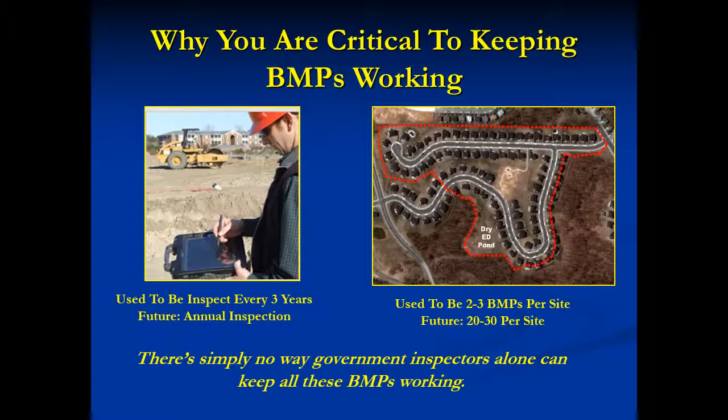Most groups focus on policy issues, education, or restoration projects. Very few groups have ever inventoried watershed activities to ensure compliance.

There are 5 topics which make up this presentation. With the knowledge provided by these topics, you can look at a small sampling of stormwater BMPs in your watershed and get a sense of maintenance quality. If you find that all are well maintained, then go on to the next regulated activity. If not, then pursue the suggestions offered here and in the manual for providing local government with the public support essential to improving maintenance.

About 80% of all Americans live in suburban urban areas. This means that the waters closest to our homes are degraded due to stormwater runoff and other impacts from our homes, businesses, streets, parking lots, and other impervious surfaces. This aquatic resource degradation is due to these 5 changes brought about by watershed development.

For those of you not familiar with the term, a watershed is all that land which contributes water to a wetland, stream, river, lake, estuary, or some other type of water body. On the left, the red line delineates the 64,000 square mile Chesapeake Bay watershed, and any rain falling within the red line will eventually enter the bay or evaporate back into the atmosphere. The perimeter is formed by hilltops, ridgelines, and other high points which divide the watershed of one body from that of another water body.

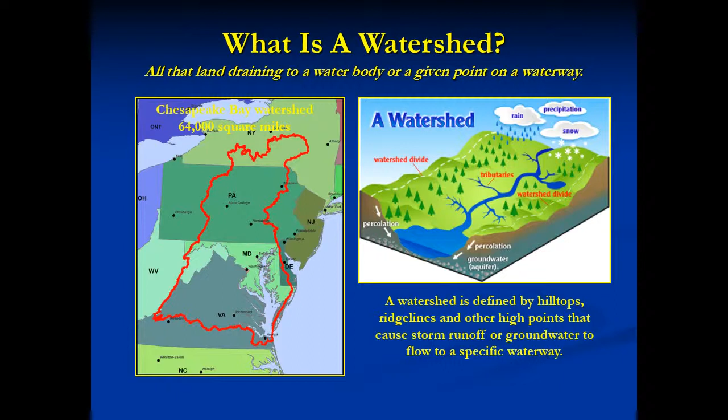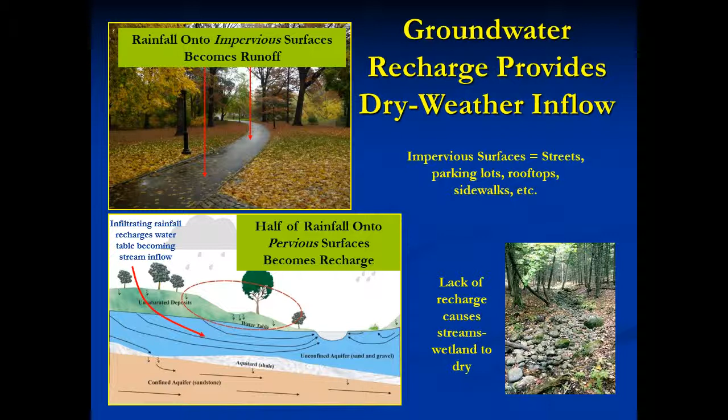In general, about half of the precipitation falling upon a watershed will soak into the soil to a depth below the root zone of trees or other vegetation. This infiltrated water will then flow through the earth until it encounters a well, a seep, a spring, a stream, a lake, or a tidal body. It is this process which provides the water entering a wetland or stream when a few days have passed since the last rain. The movement of rain or other precipitation into the soil is called groundwater recharge. Covering the land with streets and other impervious surfaces prevents recharge and increases surface runoff.

By physical damage, we mean heavy equipment operating in wetlands or stream channels, as well as the removal of forest from near channel buffer areas and the floodplain. While the major bay watershed states have achieved tremendous success in slowing the pace of aquatic habitat destruction, it still occurs, and it can take decades to a century for a waterway to recover from this form of impact. This is why it's critical to preserve forest buffers along waterways and wetlands.

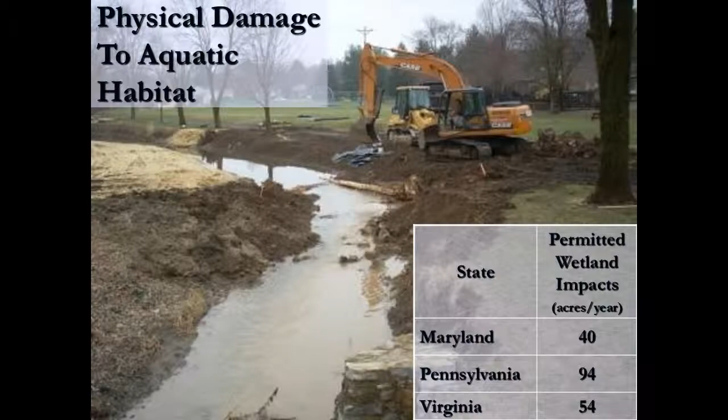Converting a forested watershed to one blanketed by homes can increase the frequency and severity of flooding by 100-fold. In other words, floodwater volumes and velocities that once occurred every 100 years before development can come annually once home construction is completed. The tremendous increase in the velocity and volume of floodwaters causes a dramatic increase in stream channel erosion.

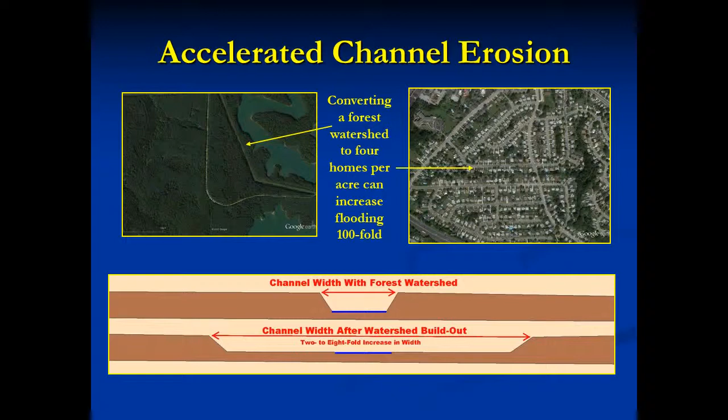Part of the increase is due to replacing permeable forest soils with impervious surfaces like rooftops and asphalt. The other part is due to replacing natural channels which slow runoff velocity with very smooth street gutters and storm drains. These smoother surfaces allow runoff to gather quickly into massive scouring floods. Combined, these two mechanisms can cause a forest channel to erode to a width of 2 to 8 times greater following watershed development, as you see at the bottom of the slide.

Runoff from developed lands can transport more than 100 pollutants into waterways. In fact, most aquarium fish would die if placed in runoff collected from a suburban or urban street. A substantial portion of this pollutant originates from industrial smokestacks, car exhaust, or other air pollution sources. When this air pollution settled on the forest floor, much was removed when transported into the soil by percolating rain. But in a developed area, the pollution settles on rooftops, streets, and other impervious surfaces, where instead of soaking into the soil, it washes away with the next rain.

Other pollution sources include lawn fertilizers and pesticides, pet waste, and dumping oil down storm drains, to name but a few. Highly effective BMPs reproduce the forest floor effect with organic filters that allow treated runoff to infiltrate underlying soils.

Scientists have found that a minimum amount of forest must be retained in a watershed to keep waters in a condition suited to sensitive fish, wading, or even swimming. To preserve high-quality waters, a minimum of half the watershed must be forest. The poorest quality waters have less than 30% forest cover.

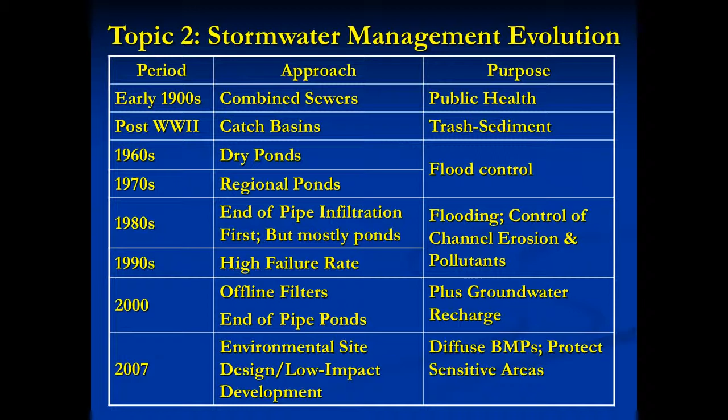Here you see an example of the type of stormwater management practiced before the 1960s. Toilet water and street runoff would be carried in the same combined sewer pipes to a wastewater treatment plant. This worked fine during low-volume rains, but the sewers would overflow come higher volume floods, causing extensive pollution. Catch basins did capture gravel and coarser objects, but not much else.

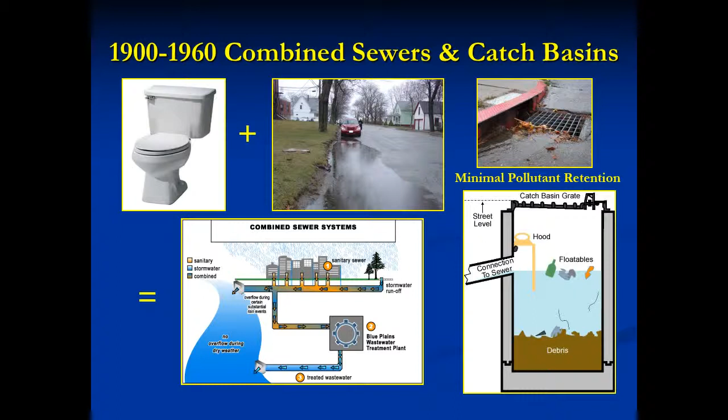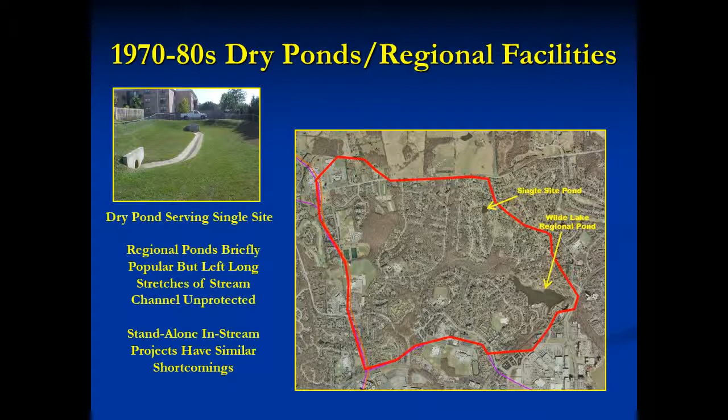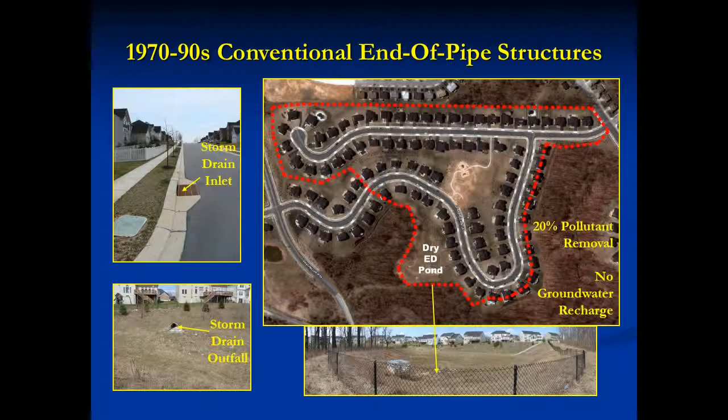Earlier I mentioned end-of-the-pipe structures. This is what I meant. The red dashed line defines the drainage area for the dry extended detention pond on the right. There are 80 homes located within the 28-acre pond drainage area. The pond is the only stormwater facility serving this 28-acre area. Runoff from the drainage area enters inlets like the one you see on the left, then discharges into the pond at this outfall. Unfortunately, extended detention provides very ineffective pollutant removal and poor aquatic resource protection. The large drainage area also increases the likelihood that this practice will eventually fail.

In the 1980s and 90s, infiltration practices began to appear. The idea is simple: you excavate a trench into sandy or other permeable soils, line the trench with filter cloth, and fill it with stone. You then divert runoff from nearby streets or other impervious areas into the stone-filled trench, where pollutants are removed and the filtered runoff soaks into the adjacent soils. An infiltration basin resembles a pond, but is built on permeable soils and is designed so most runoff percolates down through the bottom.

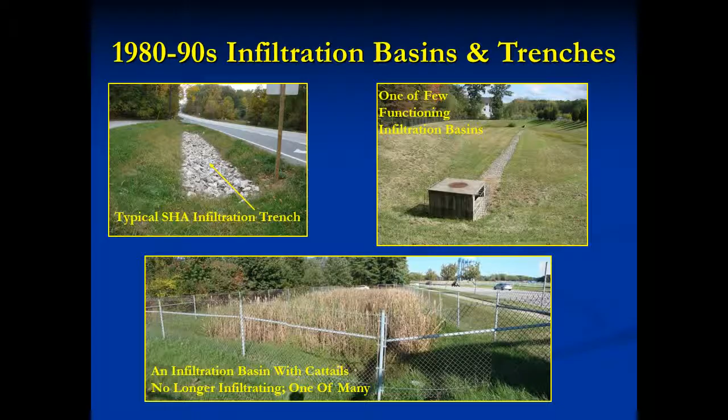Around 2005, we started seeing LID and ESD, and with it smaller, highly effective BMPs spread throughout a development project, usually in places that would have been landscaped otherwise. They're placed at the edge of parking lots or at roof downspouts, so they're before the pipe. This approach mimics forest conditions and has the potential to allow development with very little aquatic resource impact.

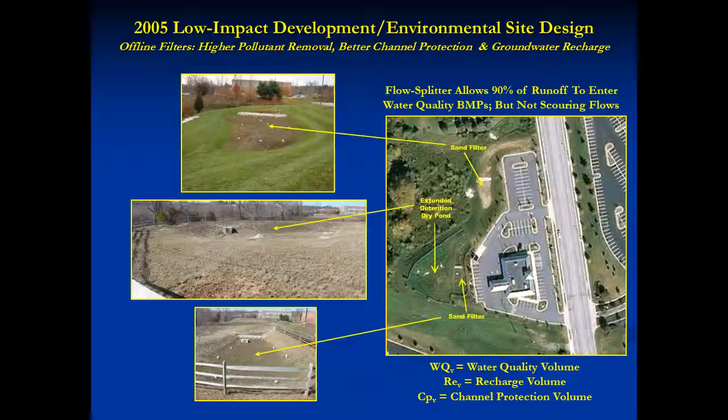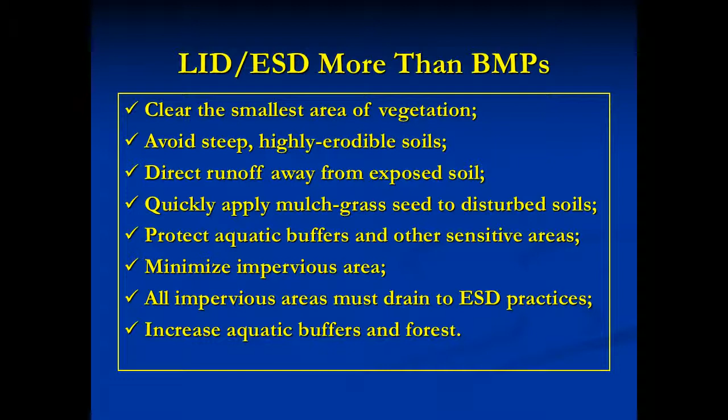But ESD and LID are more than just highly effective practices to treat runoff. Here we have a distillation of ESD-LID basic principles. The idea is to design projects to be as compact as possible by minimizing road widths, building multi-story rather than one sprawling one-story structure. It's easier to fit a compact project onto the least erodible portions of a site while preserving aquatic resource buffers and forest. The compact design reduces impervious area and makes it easier to locate these areas so they drain to soils suited to highly effective ESD-LID practices.

Here we see four typical ESD-LID practices. By spreading the practices throughout the site, groundwater infiltrates the soil in a more natural, diffuse manner. It's hoped that the smaller drainage areas and the use of mulch will result in lower failure rates and better pollutant removal.

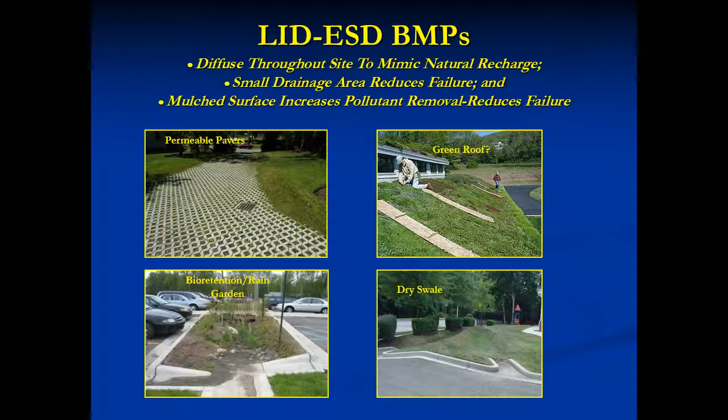While ESD and LID can halt the loss of additional waters due to new development, they also have the potential to restore waters degraded by past growth. For example, let's say a 1-acre fast food store is redeveloped as an auto parts store, but with highly effective ESD-LID practices. The uncontrolled runoff from the fast food store was degrading an average of 300 feet downstream.

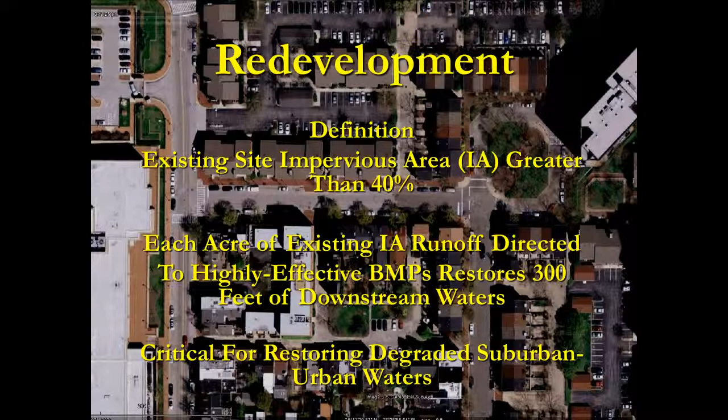Since the new store drains to these highly effective practices, those 300 feet of waterway are no longer impacted. There has been a trend in some areas recently towards reliance upon in-channel stream restoration projects to restore degraded suburban and urban waters. While these projects certainly have a role to play in restoration, they must follow the installation of runoff control measures throughout a developed watershed. Otherwise, the tremendous power of floodwaters could cause these in-channel measures to quickly fail.

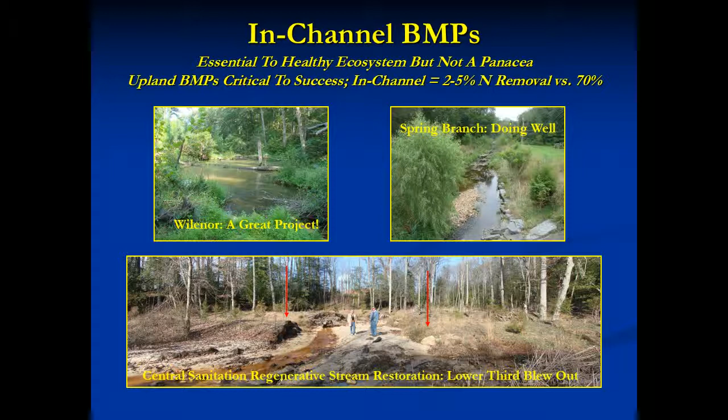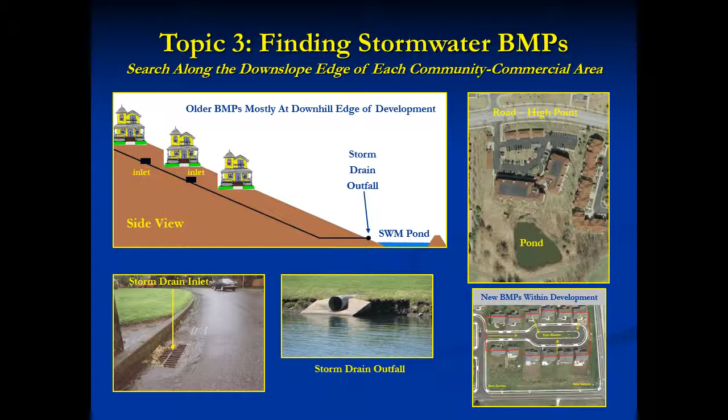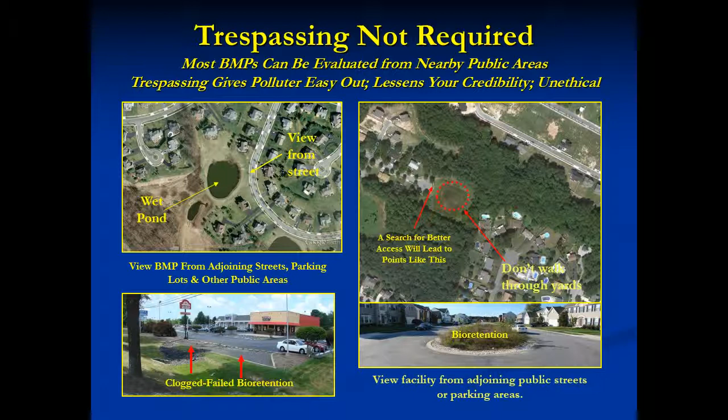The vast majority of BMPs can be evaluated from adjoining parking lots, streets, or other public areas. Please do not venture onto private property or walk past a no trespassing sign to evaluate a BMP. If this is necessary, then request the property owner's permission first.

Most BMPs fall into one of three categories: ponds, infiltration, and bioretention or filters. Most ponds are dry between storms, while the most effective retain a permanent pool of water. Infiltration measures usually have an observation well, frequently made of white plastic pipe. Bioretention and filters have a surface depressed about a foot below the first point where runoff could overflow. Observation wells are common too.

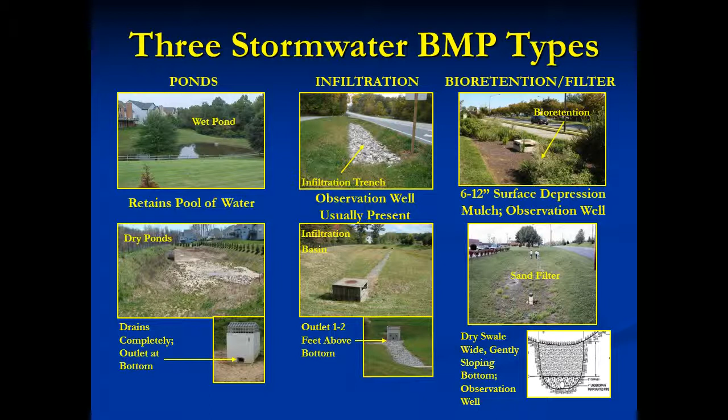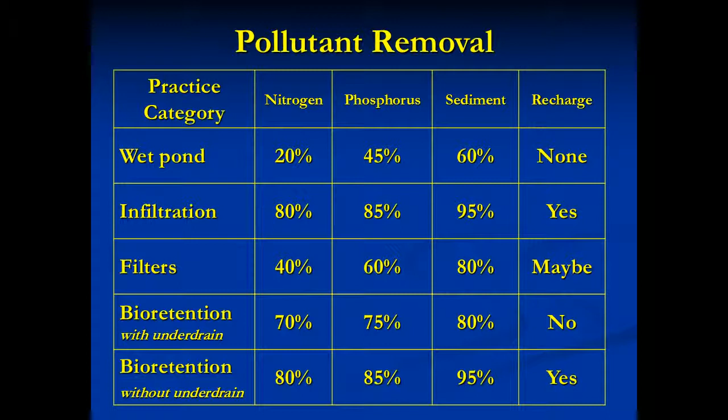Here we see a comparison of the relative effectiveness of the three BMP types. Clearly, infiltration and bioretention without an underdrain removes the most pollutants and also allows the treated runoff to recharge the groundwater table. This recharge provides the dry weather inflow to wetlands, streams and other waters. Filters can provide recharge too, unless they are fitted with an underdrain. Underdrains are used where soil is not very permeable or there is a shallow depth to rock or water.

Now for topic 4. With regard to ponds, we urge you to focus on those that hold a pool of water. These are the most effective ponds. Pollutant removal in ponds is all about storage volume. The more water, the more time pollutants have to settle from suspension. Over time, a pond captures sediment, which is then colonized by cattails and other vegetation. If a pond has lost more than half its original volume, then it needs to be cleaned.

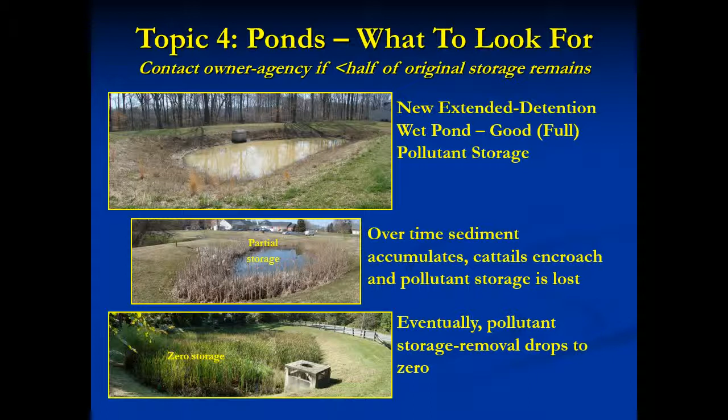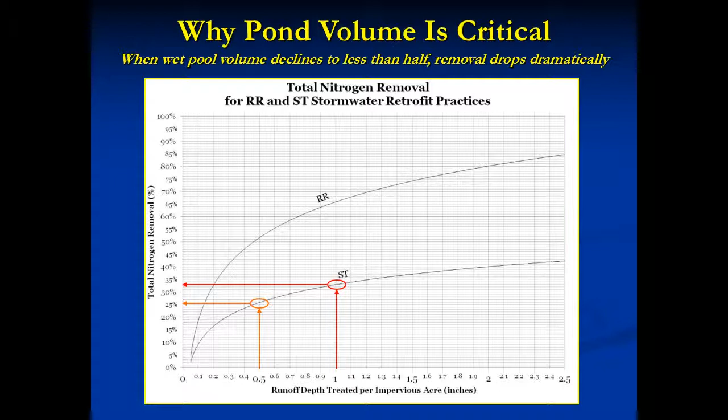This graph is from the Chesapeake Bay Program's guidance for stormwater pollutant removal. Ponds belong to a group of BMPs known as stormwater treatment, or ST measures. As this graph shows, a pond that stores the first half-inch of runoff from impervious surfaces captures about 25% of the nitrogen entrained in that runoff. Most ponds are designed to store an inch of runoff when new. Such a pond captures 33% of the nitrogen. So as storage declines, so does pollutant removal.

Ponds are constructed in two ways. On flat sites, a pit is excavated to form the pond. On hilly sites, an earth embankment is placed across a shallow valley.

Of the two, embankment ponds are most likely to have safety issues. When viewing the dam forming an embankment pond, look for any low spots. If floodwater overtops the embankment and concentrates at such a low spot, the dam could wash out. Trees, animal burrows, or wetlands on the dam are also cause for concern and must be eliminated.

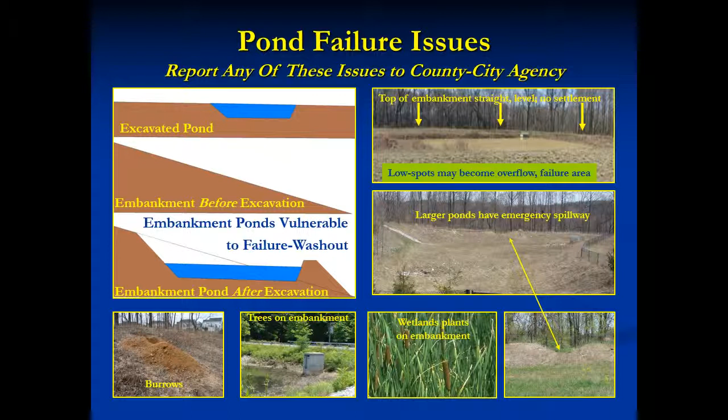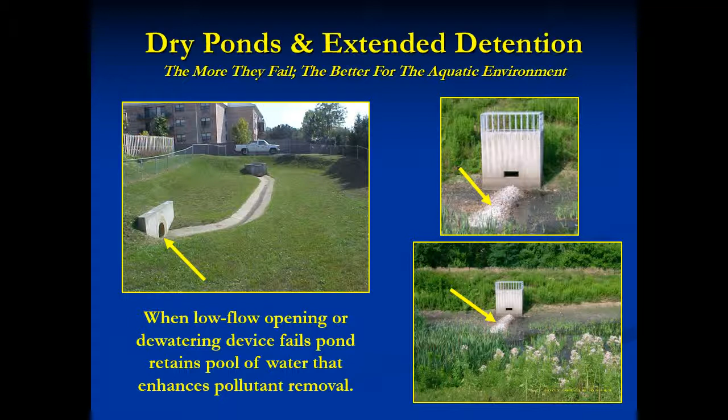Earlier we said to ignore ponds that don't hold a pool of water. These are dry or extended detention type ponds. Dry ponds trap 0 pollutants. Extended detention ponds might trap 5 to 25% of the pollutants transported into them. However, both may fail in ways that cause retention of water, which enhances pollutant removal. But failures can be dangerous. It's better to retrofit these ponds so they can safely store a permanent pool of water.

Infiltration basins look a lot like a dry or extended detention pond. To tell the difference, look for observation wells, or a stone trench on the floor, or the basin bottom, which penetrates down into permeable soils. Also, the first point where runoff can exit will be at least a foot or two above the pond bottom.

Over time, fine particles may accumulate on the basin floor, sealing the surface. These areas then hold water for longer periods. Eventually, wetland vegetation may grow in these areas. These clogged soils should be scraped away to restore infiltration.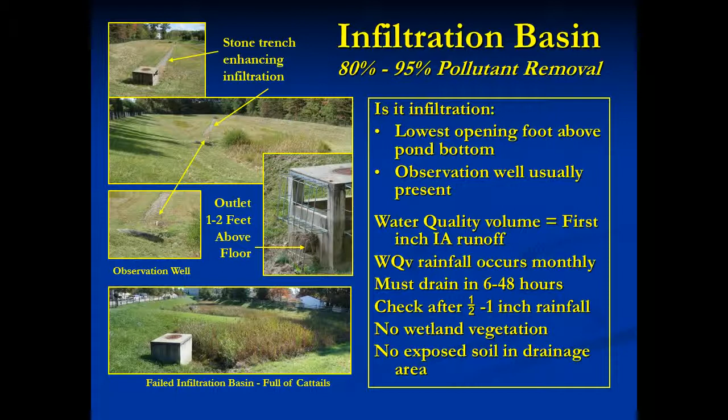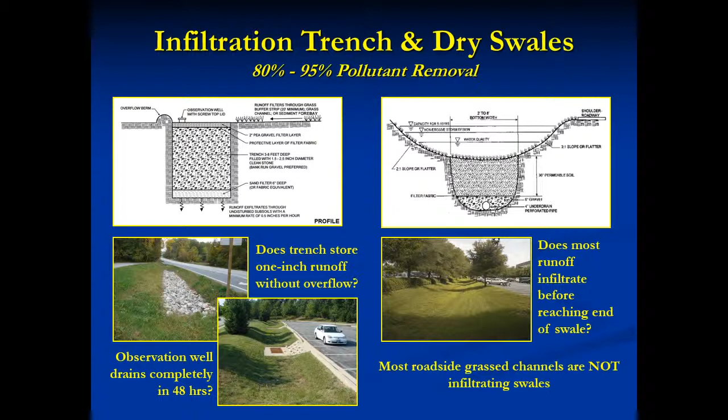With infiltration trenches, look for indications that it can no longer treat the first inch of runoff. This is best done with the rain gauge and float method you'll see a few slides from now. With dry swales, look for evidence that the surface is clogged, wet spots when several days have passed since the last rain, or wetland vegetation.

Bioretention will be the most common BMP in the future. Most consist of a pit 3 to 5 feet deep. The bottom may have a gravel layer, though most of the pit is filled with a mixture of sand and organic matter resembling planting soil. The surface has a 2 to 3 inch layer of wood mulch. The mulch surface is depressed a foot below the point where runoff could exit first. Here you see 4 examples.

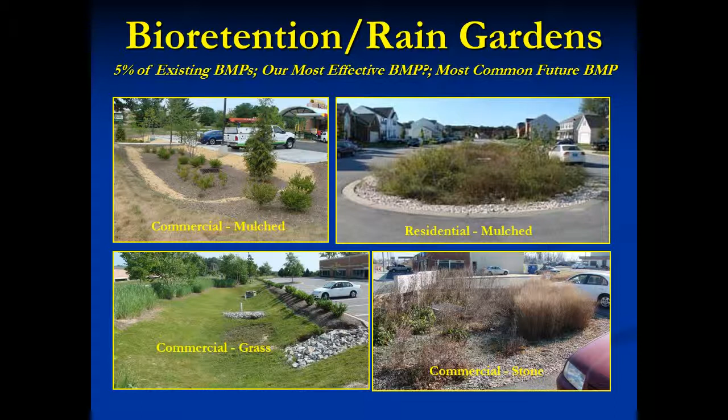Here you see a cross-section of a typical bioretention facility. The 2 most critical bioretention components are the surface layer of mulch or vegetation, along with the highly permeable planting soil, which allows runoff to percolate through the underlying soil where recharge occurs.

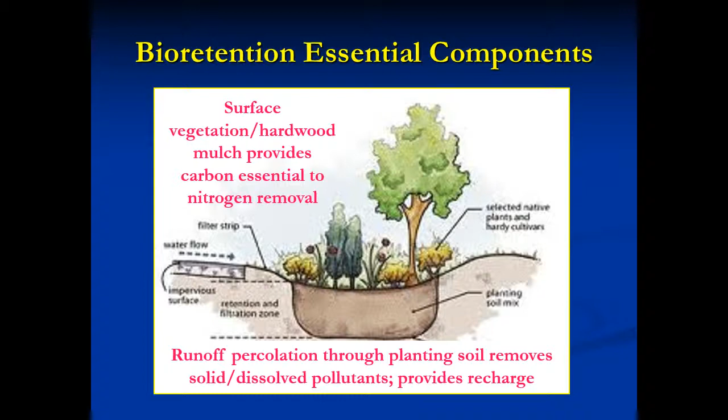Bioretention facilities must drain completely in 48 hours. So if you see standing water or wetland vegetation, repairs are needed. Note the storm drain inlet in the lower left. You'll see such an inlet in most bioretention facilities.

The surface of the mulch must be at least 12 inches below the point where accumulating runoff could first enter the inlet. This 12-inch storage allows the facility to treat 90% of all the runoff it receives. If the storage depth is less than 6 inches, then cleaning is likely required.

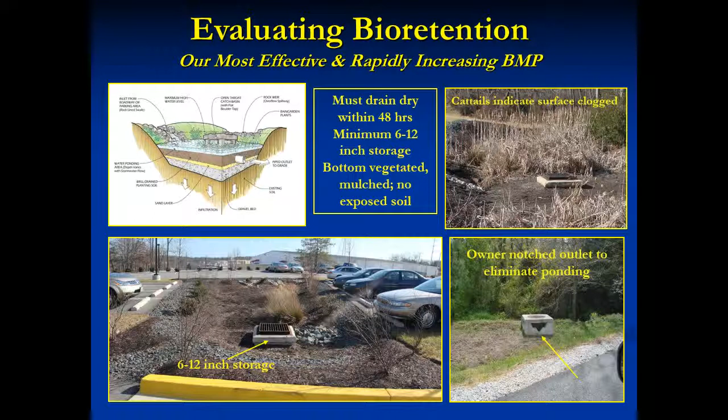Nothing kills a BMP faster than sediment-laden runoff from soil exposed in the area draining to the BMP. It's imperative that exposed soil be protected with straw mulch, a tarp, or other measures as soon as possible following disturbance.

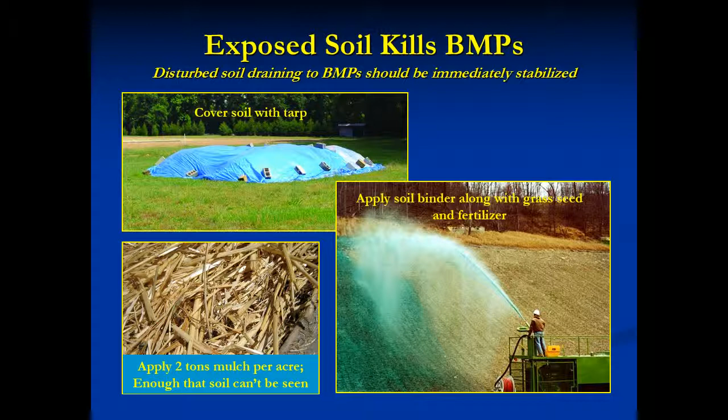Here we have the rain gauge and float method mentioned earlier. Use this method when a half-inch or more rain is predicted. The float, a stick, is placed at the point where runoff could first exit. A string tied to the stick is tied off elsewhere. A rain gauge is placed next to the BMP. Come back after the storm.

You'll recall that most facilities are designed to treat the first inch of runoff. So if the rain gauge holds less than an inch of rain, but the float was washed into the inlet, then the BMP lacks sufficient capacity.

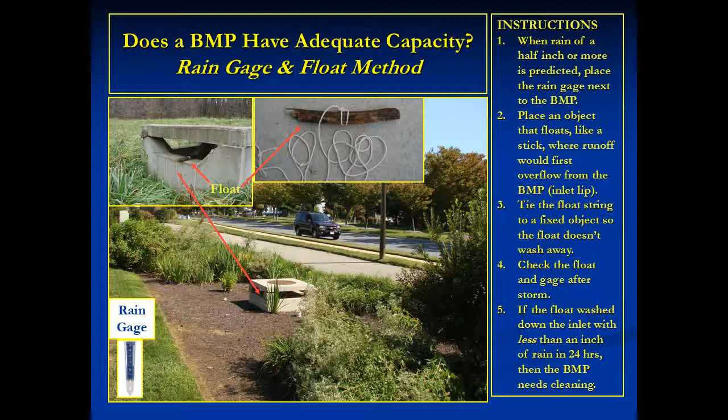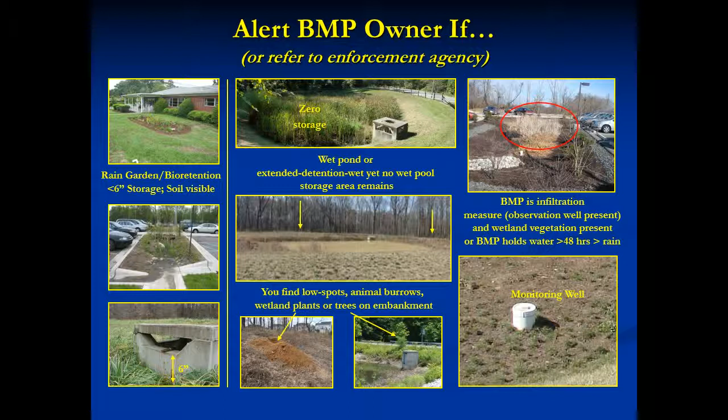Most of the problems you'll find are not of the imminent threat variety. In these cases, consider making a neighborly contact with the BMP owner first. If the BMP has maintenance problems, the inspection agency is probably overworked and hasn't visited the site recently. By working with the owner, you can accomplish two things: get the problems fixed more quickly and establish a working relationship. BMP owners may be businesses or homeowner associations active in your watershed.

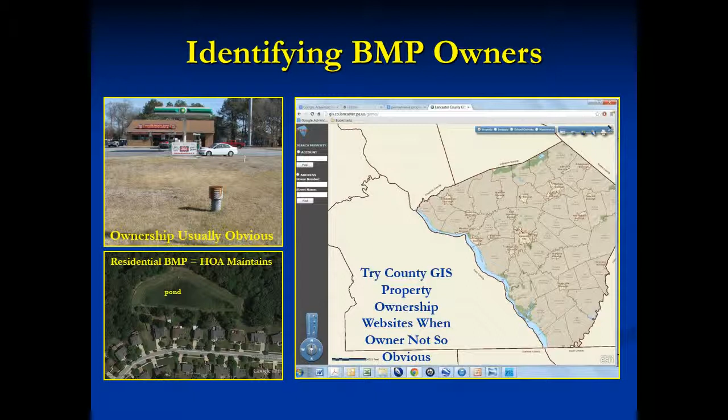So what happens when a responsible party doesn't cooperate or an enforcement agency fails to act? First of all, these will be rare instances. Your first step should be to contact the official who represents you on the legislative body that oversees the enforcement agency - this will be a city council, county commissioners, aldermen, etc. If you can show you tried to work cooperatively and got nowhere, it's likely the official will make some calls.